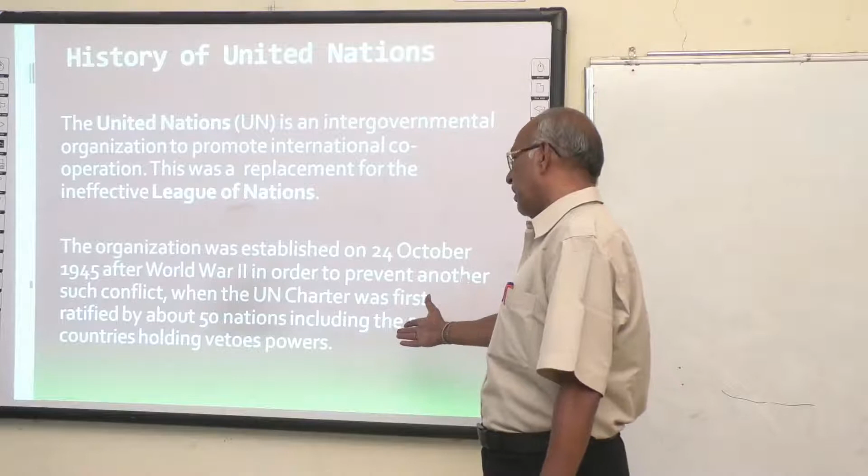Initially, it started off as the Inter-Governmental Maritime Consultative Organization. Since it was a consultative organization, the countries that were pioneering or trading in the sea were using it as a consultative organization to take counsel and consultations on topics which affected them in the shipping industry. But then it proved to be a toothless organization.

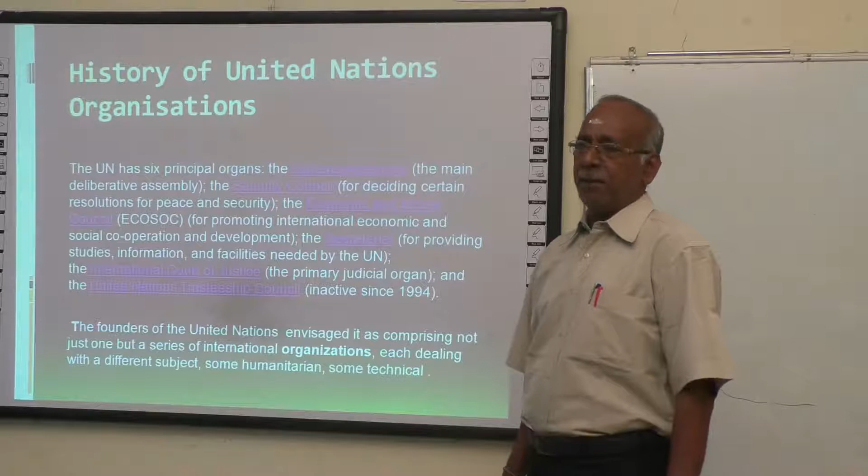Therefore, to make an effective organization to rigidly control the multivarious facets of shipping, the IMO came into being.

The United Nations has got 6 principal organs. Number 1 is the General Assembly. The second is the Security Council. The third is the Economic and Social Council. And then the Secretariat, the International Court of Justice, and the United Nations Trusteeship Council.

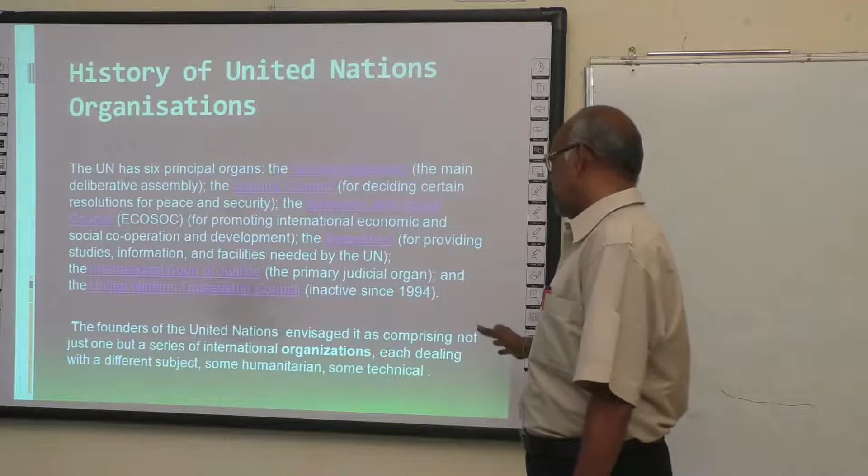The founders of the United Nations said that the international organization deals with different subjects, some humanitarian and technical. As a result, a number of specialized agencies were established, and agencies which already existed were brought within the framework of the United Nations. In 1944, the International Civil Aviation Organization was founded. The Food and Agricultural Organization (FAO) and the United Nations Educational, Scientific and Cultural Organization (UNESCO) were created in 1945, followed by the World Health Organization in 1947.

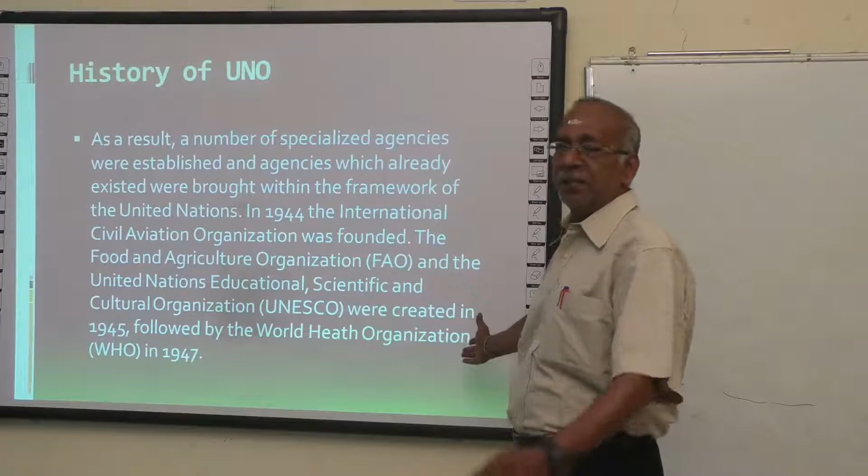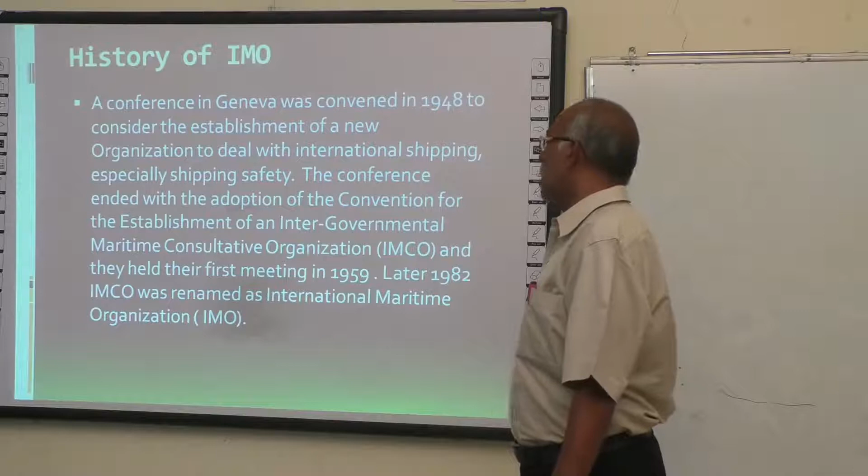A conference in Geneva was convened in 1948 to consider the establishment of a new organization to deal especially with the safety of ships. This conference ended with the adoption of the Convention for the Establishment of an Intergovernmental Maritime Consultative Organization, or IMCO. This IMCO is the forerunner, or preceding organization, for IMO, and later in 1982, IMCO was renamed the IMO, or International Maritime Organization.

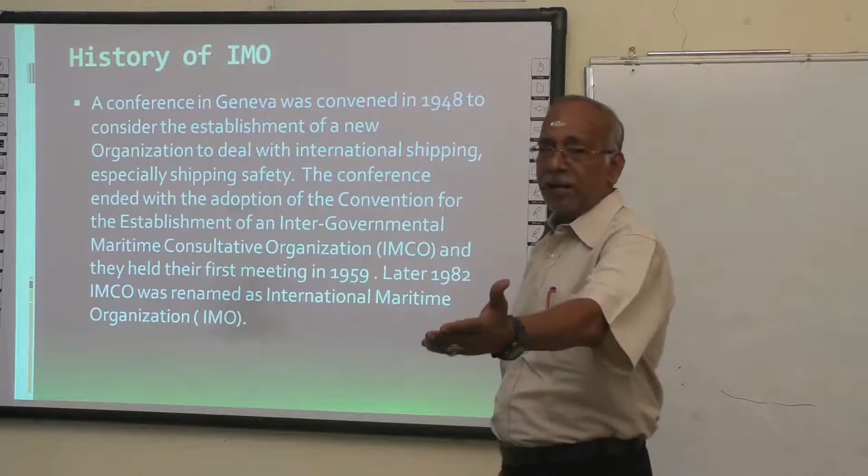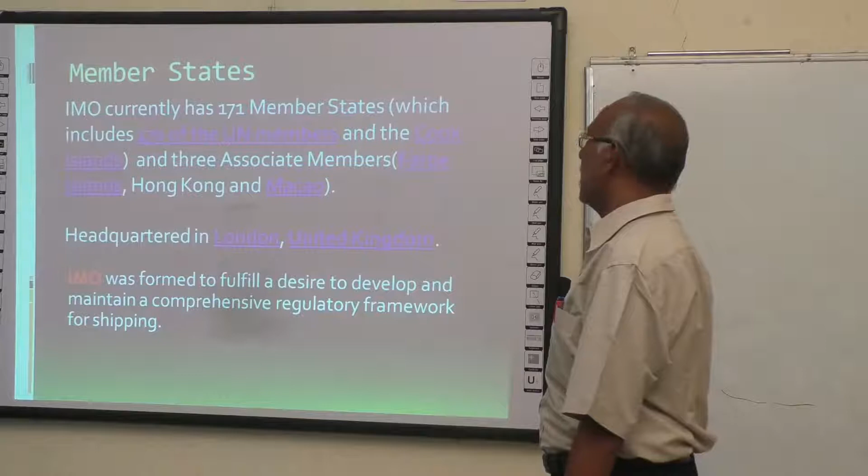Presently, IMO has a strength of about 171 members, 170 UN members and the Cook Islands, and 3 associate members, the Faroe Islands, Hong Kong, and Macau. The IMO's headquarters is in London, in the United Kingdom. It was formed to fulfill the desire to develop and maintain a comprehensive regulatory authority for framing the rules for shipping.

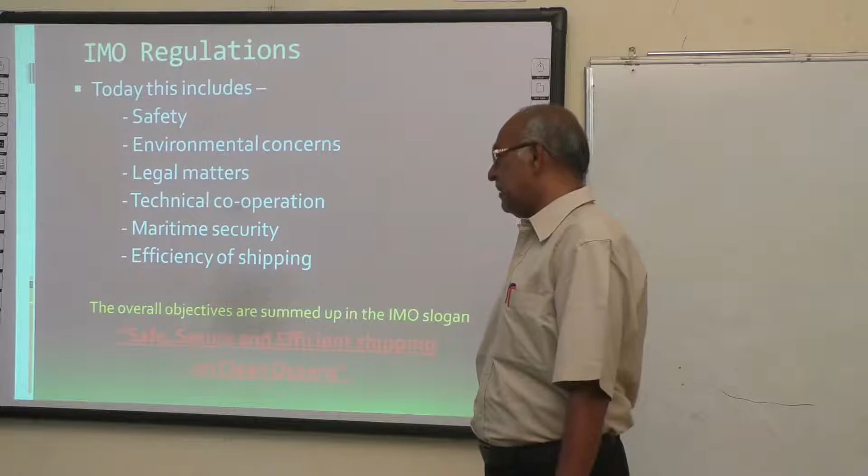IMO regulations, or some of the aims of IMO: first is safety, then to address environmental concerns, legal matters pertaining to shipping and hazards, technical cooperation among members, maritime security, and the efficiency of shipping. In short, putting it in a nutshell, the overall objectives are summed up as an IMO slogan, which says the aim of IMO is safe, secure, and efficient shipping on clean oceans. This is our main aim.

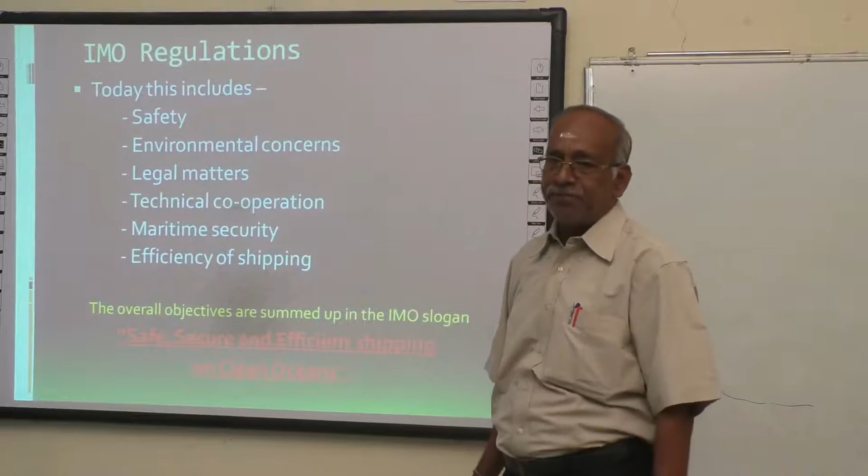So until this time, such international conventions were initiated piecemeal, notably SOLAS. It was first adopted in 1914, following the Titanic disaster. All of us must have at least heard, or many of us might have seen, the sinking of the Titanic, a ship that was built so rigidly, which broke after hitting an iceberg. Therefore, when marine casualties became very severe worldwide, there was a big hue and cry.

Ultimately, SOLAS, the expansion being Safety Of Life At Sea, was established. Whoever be the person cruising on the seas, be it as an employee or even as a passenger, the safety of life at sea was summed up in what is called SOLAS, which is a treaty that deals effectively with all important aspects of shipping.

IMO's first task was to update the convention, resulting in the 1960 convention.

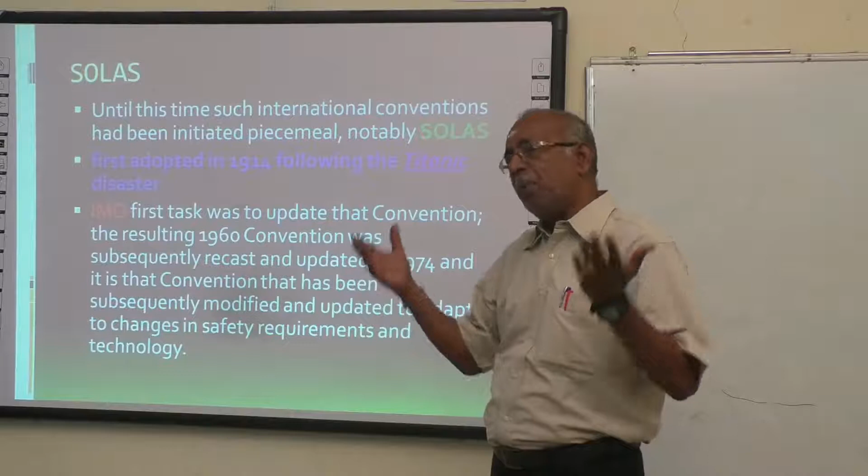A convention is nothing but a meeting. A meeting is organized among the nations, a general idea is put forth, it is deliberated, and then some resolutions are passed and brought into the framework as a rule. It has to be approved and agreed upon, then they fix up a window period for amendments, if there are any objections or alterations needed, and then they set a date of implementation from where it becomes an effective rule altogether.

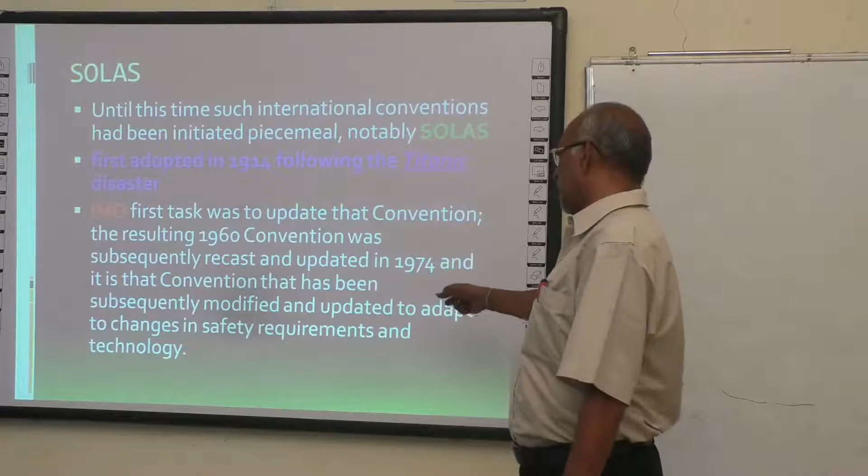Subsequently, it was recast and updated in 1974. It is a convention that has been subsequently modified and updated to adapt to changes in safety requirements and technology. That is why SOLAS stands for Safety of Life at Sea.

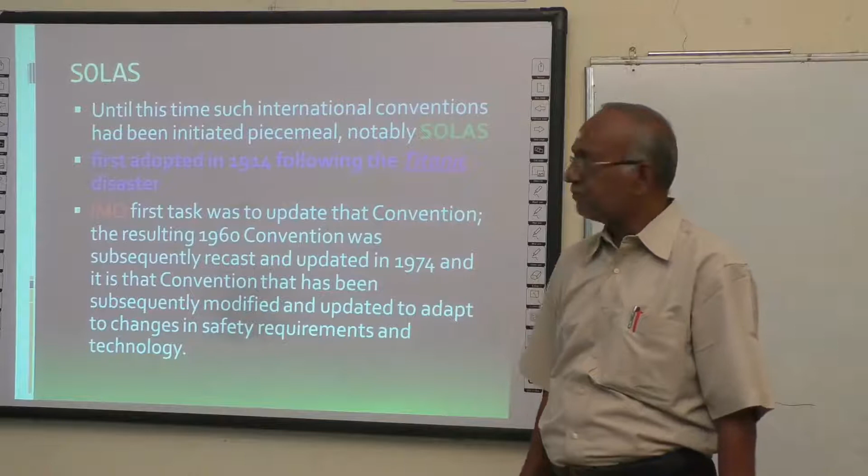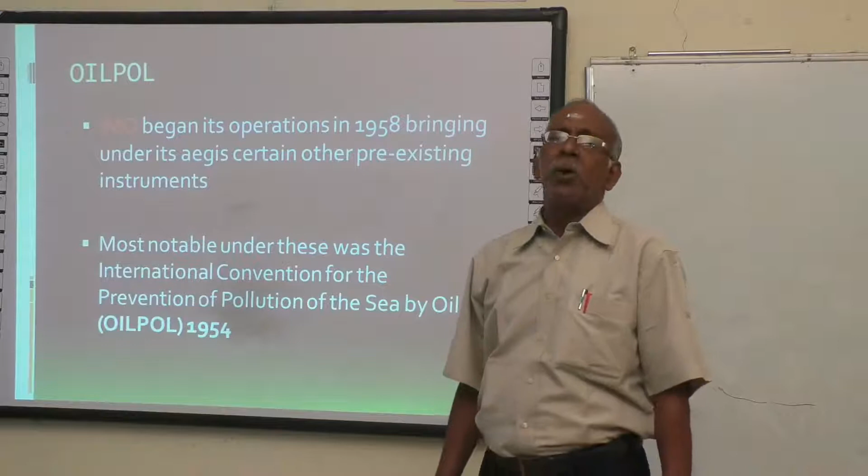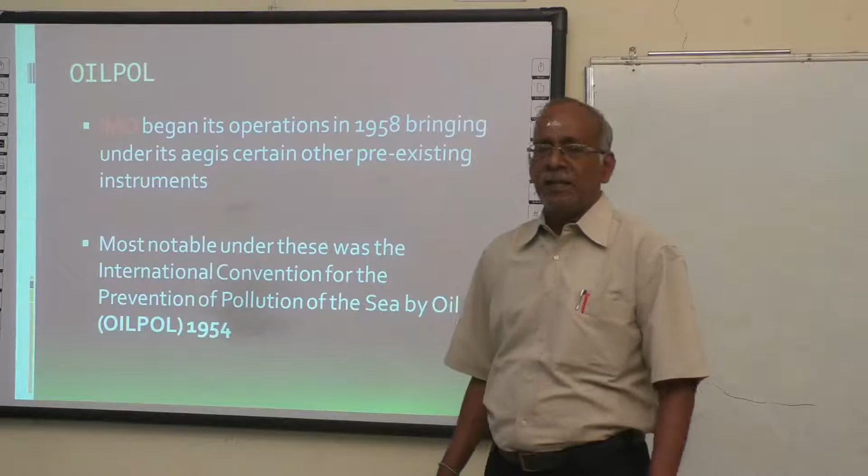The next topic they worried about is called OILPOL, a short form for oil pollution. From time immemorial, many unscrupulous ships have been pumping oil into the sea, polluting it. The main concern became oil pollution, which also resulted from shipping accidents like collisions or grounding, where ships get ripped open and oil contaminates the sea. Because of the pollution, marine life is affected, and most seashores, which are places of entertainment, hoteliering and tourism industries, were getting affected. Therefore the concern on oil pollution grew.

IMO began its operations in 1958, bringing under its aegis certain pre-existing instruments. This was actually existing earlier, as there was a meeting in 1954 regarding pollution of the seas by oil, called OILPOL 1954.

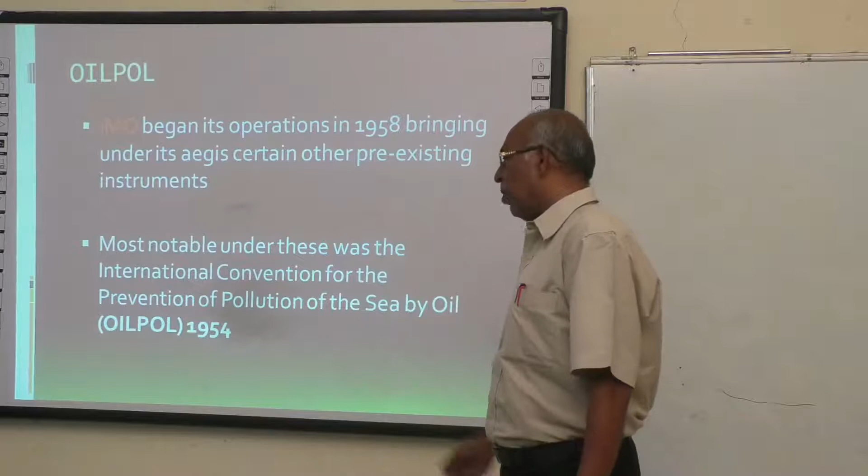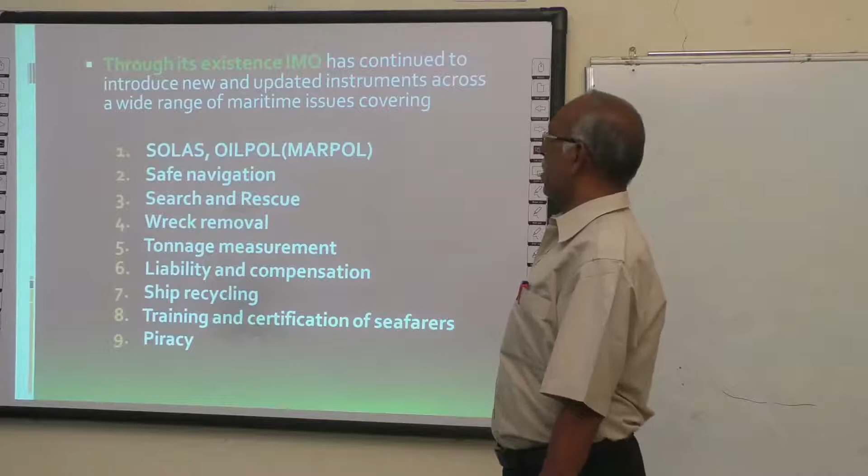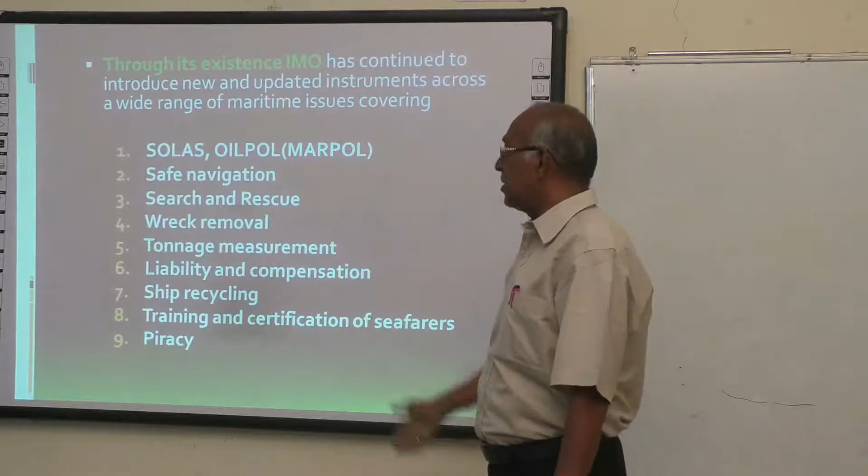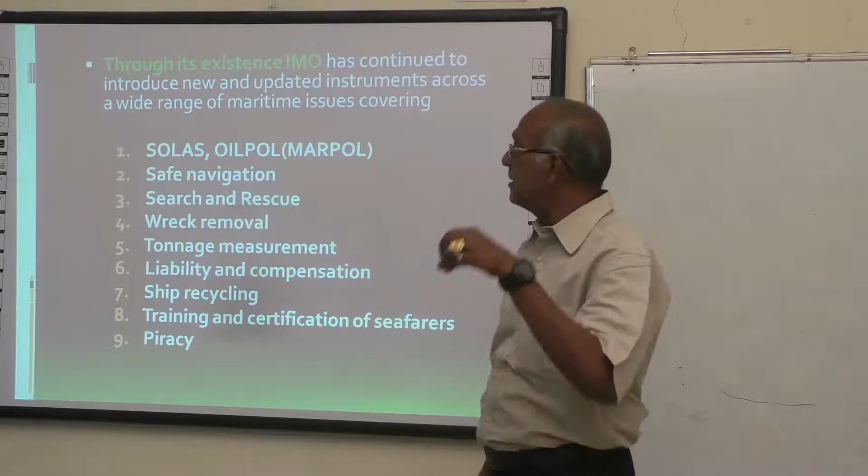Through its existence, IMO has continued to introduce new and updated instruments across a wide range of maritime issues. The topics IMO concentrated on are as follows: first, SOLAS and OILPOL, safety of life at sea and oil pollution, then safe navigation, and search and rescue. Search and rescue refers to when there is an unfortunate marine accident where lives are at stake, and people are picked up from the sea, searched for and rescued.

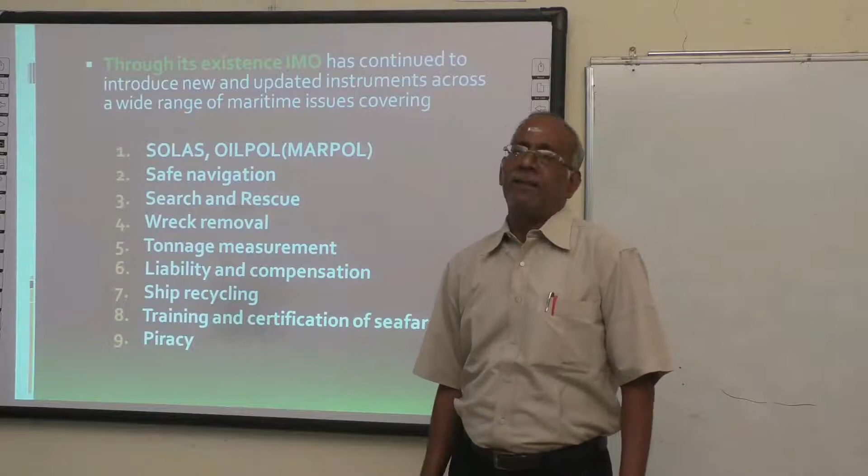Then wreck removal: when a vessel is in distress and already wrecked, it has to be removed so that it doesn't form a hazard for shipping. Then tonnage measurement for safe shipping, liability and compensation. In spite of all this, should there be any marine accident, the question of compensation by the affected parties arises, and from where to claim, how to recover, who will arbitrate, under what guidelines - these are dealt with under liability and compensation. And then ship recycling.

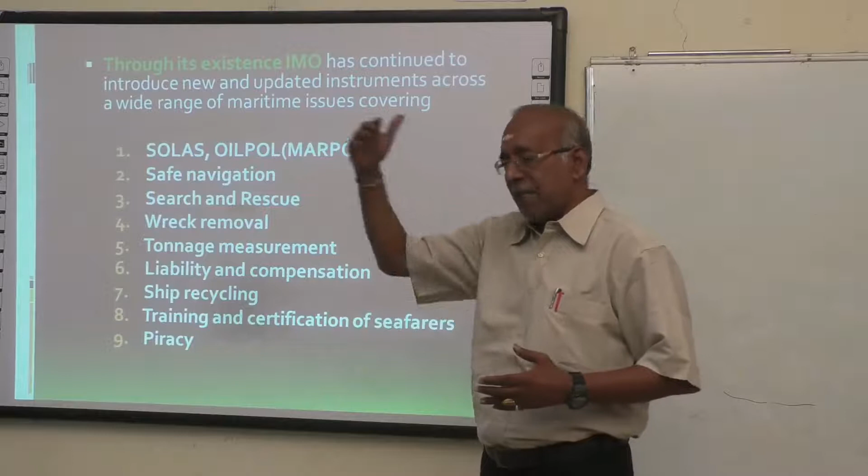A ship, like any other item, has a shelf life - a service life period of about 25 or 30 years. After that period of seaworthiness, the ship is scrapped and the plates are cut out, sent to re-rolling mills. Then steel plates are rolled out and new ships get built. That's what we call ship recycling.

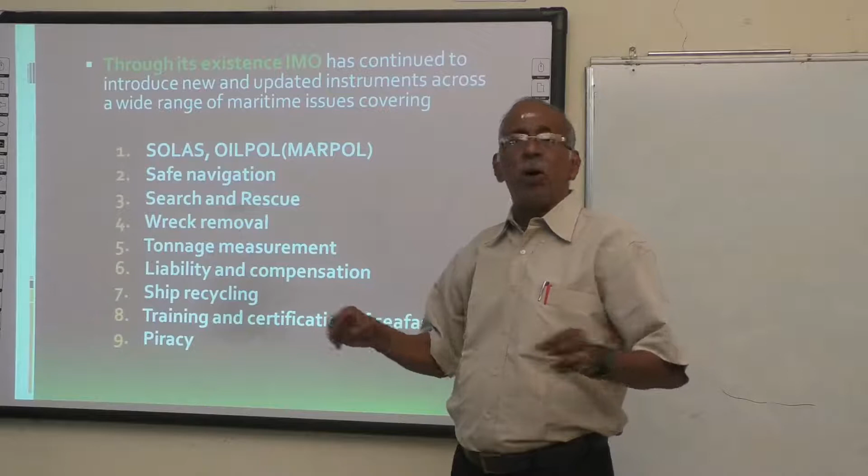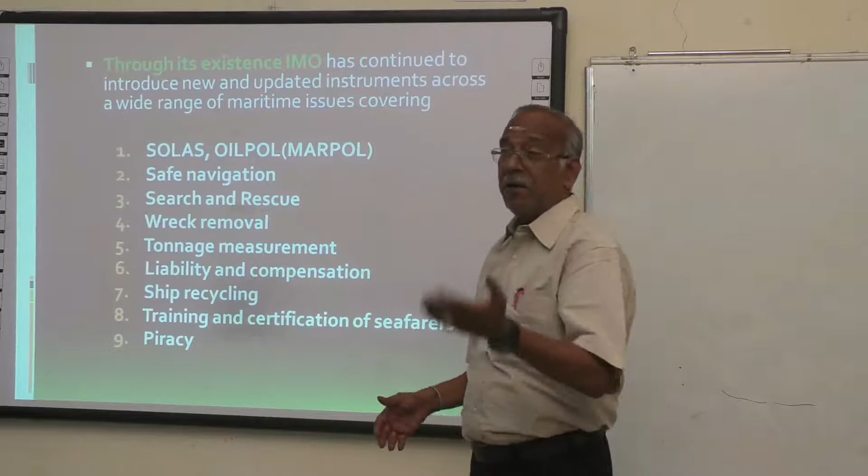And then training and certification of seafarers. Different nations have different training standards and different mediums of instruction. When the question of employability of a seaman goes to the international market, unless the standards of training and certification are made uniform, it becomes difficult for people of various countries to join together and work on different ships. When we have a mixed, multinational crew working on a single ship, unless the standards of their training, education and certification are uniform, the work becomes difficult. That is why training and certification of seafarers matters.

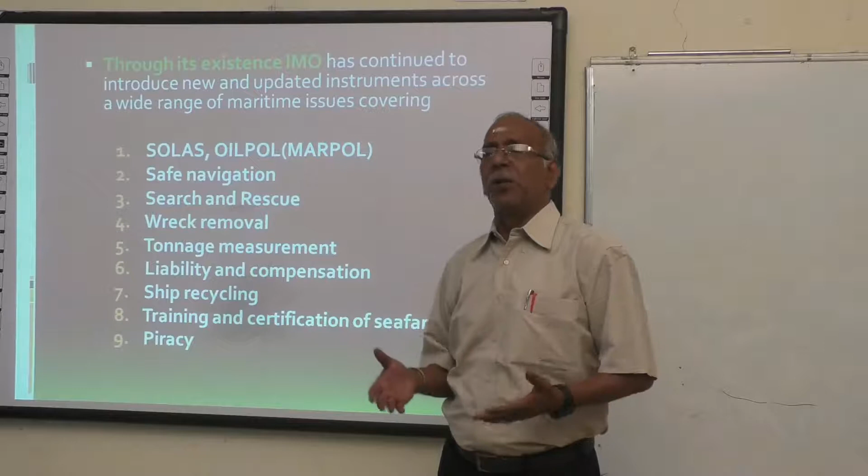And lastly, the new menace called piracy. Nowadays ships are being used as a tool, and ransom is extracted from helpless sailors for no fault of theirs. There are certain countries using piracy as a means of livelihood. In order to ensure the safety of living, there are certain standard practices which IMO will inform and enforce, which we will study shortly.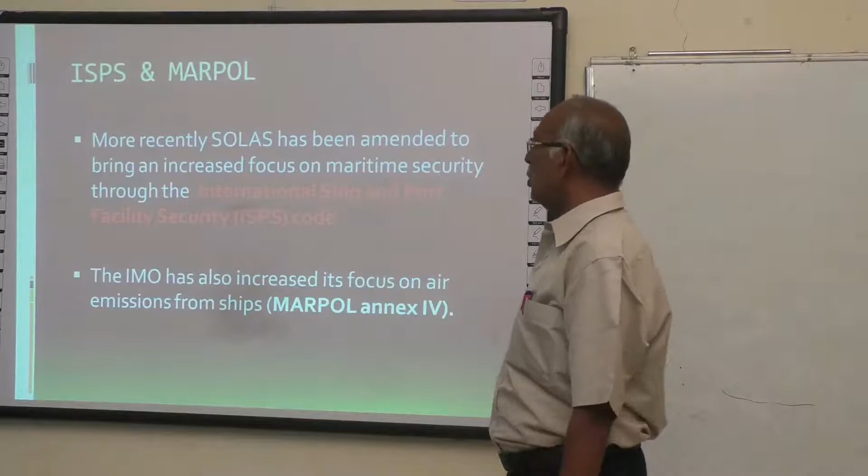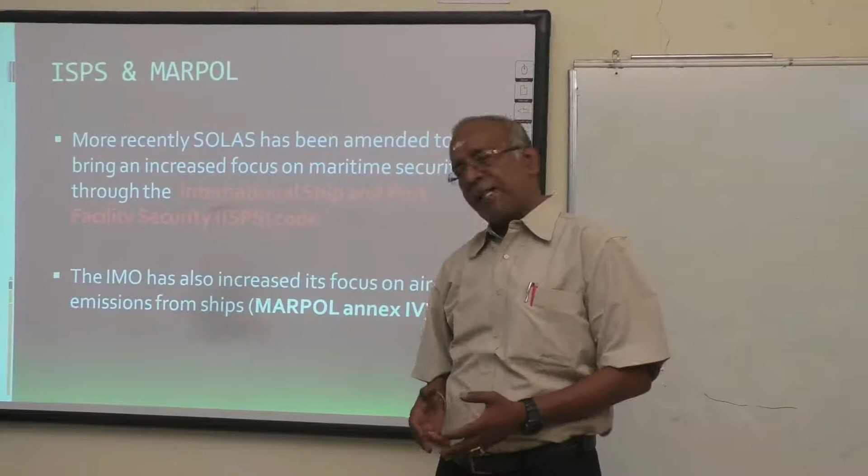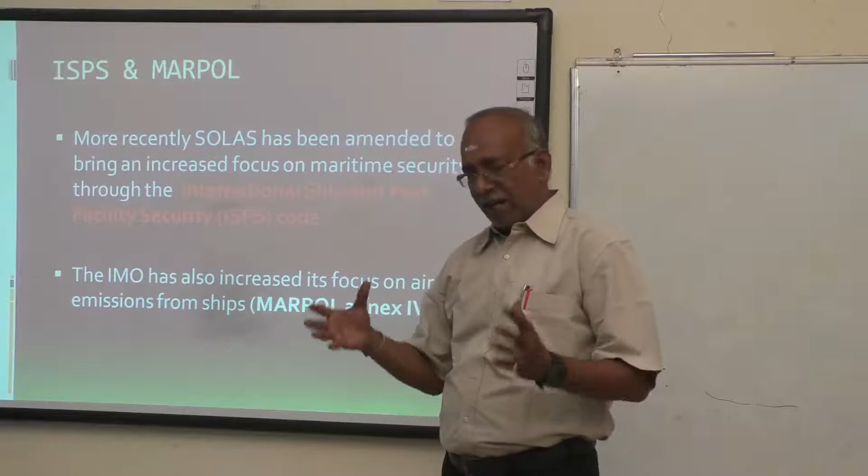ISPS and MARPOL. More recently, SOLAS has been amended to bring an increased focus on maritime security through the International Ship and Port Facility Security, or ISPS, code. This is primarily because of the menace of piracy. Since piracy has crept in, and for no fault of theirs the sailors are taken to task, their lives put at stake, held to ransom or as hostages, there is a need to know how to save the ship, how to defend yourself in case of a pirate attack, and how to react.

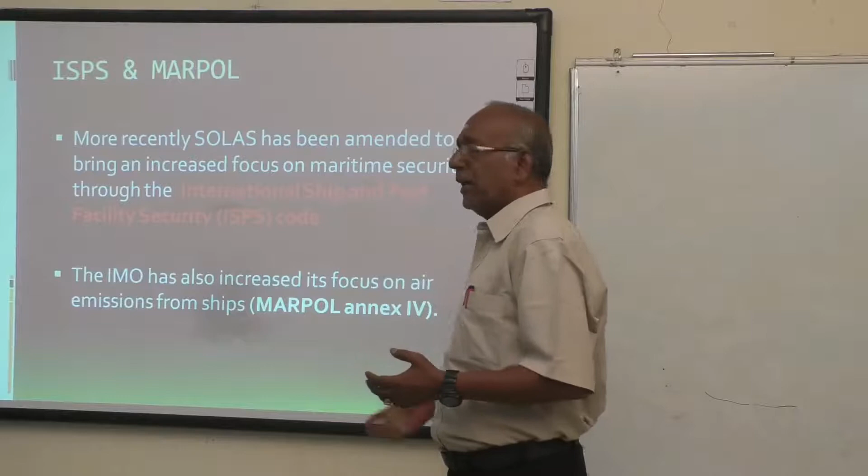That is what is called the ISPS code. IMO has also increased its focus on air emissions from ships. Earlier, in the oil code, we talked about oil pollution. Now they are also focusing on pollution of the air by emissions from ships, mostly from the funnel and uptake.

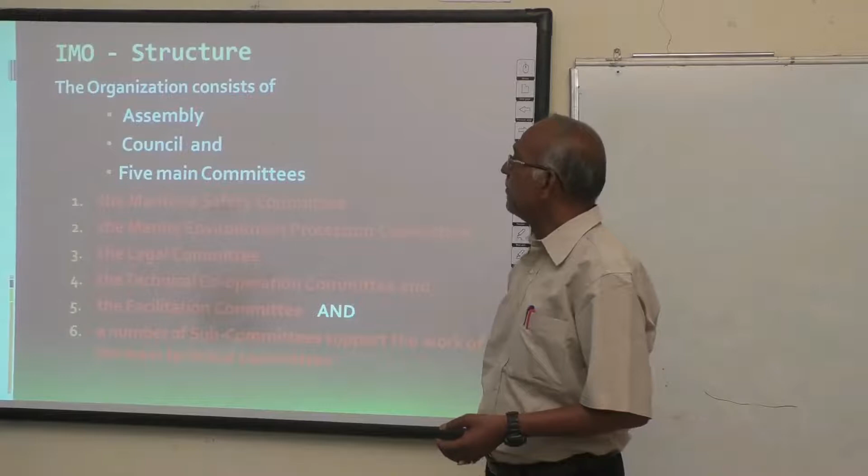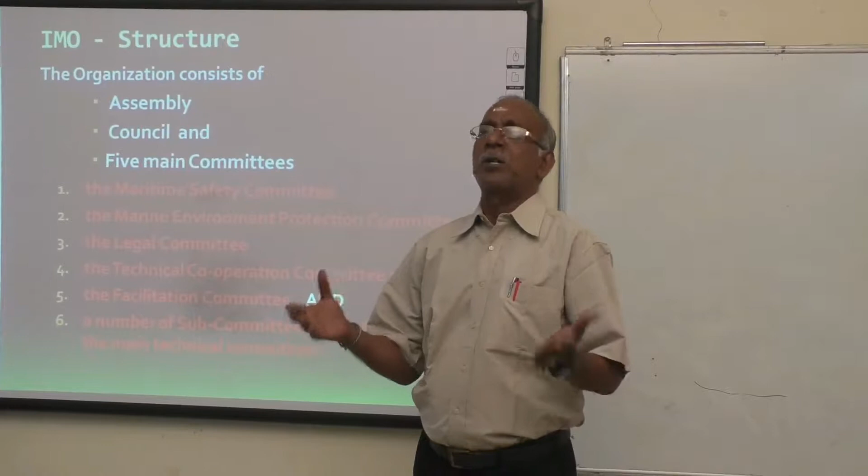Okay, having studied what is IMO and what are its aims, now let us see how IMO is structured, how it is functioning, and what are the various wings or departments of IMO.

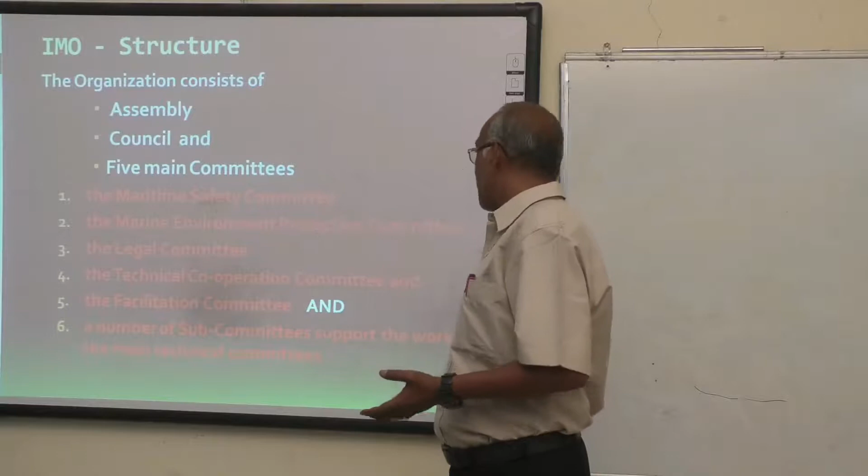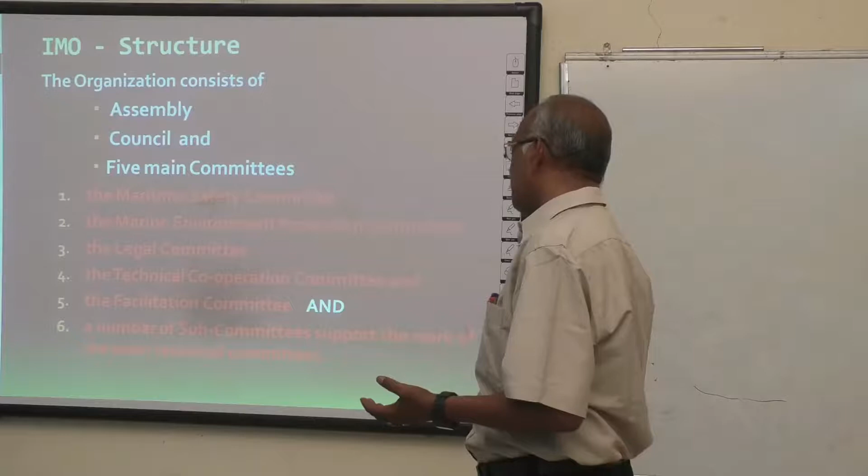The organization consists of mainly three things: the Assembly, the Council, and the five main committees. These five main committees consist of the Maritime Safety Committee (MSC), the Marine Environment Protection Committee (MEPC), the Legal Committee to deal with legal matters, the Technical Co-operation Committee, and the Facilitation Committee, along with a number of subcommittees to support the work of the main technical committee.

The governing body of the IMO is the Assembly. It meets once every 2 years, when all the members meet. In between Assembly sessions, a Council consisting of 40 member states elected by the Assembly acts as the governing body. So all members form the General Assembly, and from the Assembly, 40 members are selected to act as a governing body when the Assembly is not in session.

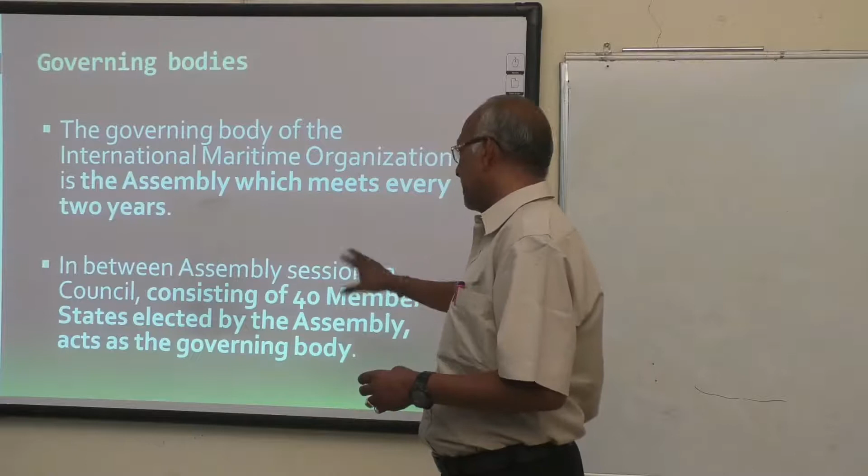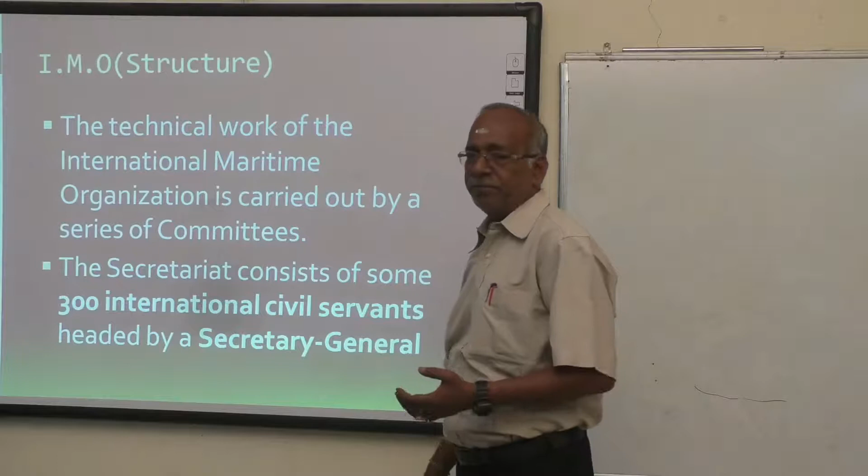The technical work for the International Maritime Organization is carried out by a series of committees. The Secretariat consists of some 300 international civil servants headed by the Secretary General. The current Secretary General is Koji Sekimizu, elected for 4 years at the 106th session of the IMO Council in June 2011, at the 27th session of the IMO Assembly, with his mandate starting on 1st January 2012.

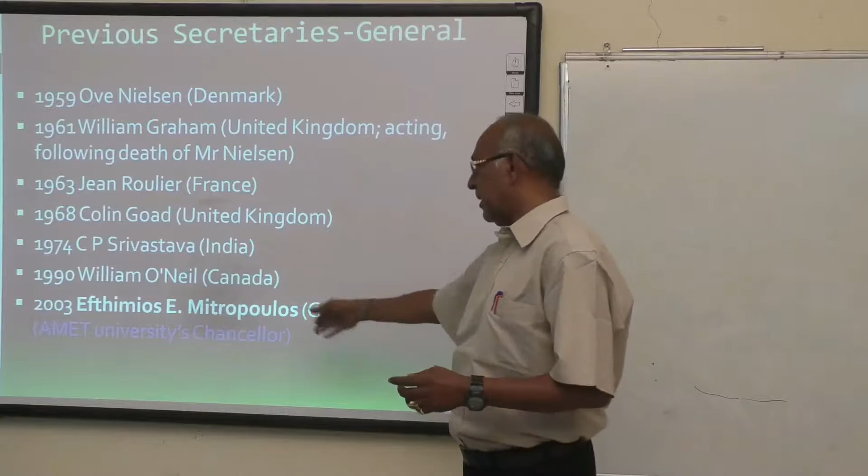Regarding previous Secretary Generals, you should be happy to know that Mr. C.P. Srivastava from India himself was one of the Secretary Generals of IMO, in the year 1974. There have been many other notable people, especially Efthimios Mitropoulos, whom as AMETians we should be proud to share visited us, and he is the Chancellor of AMET University.

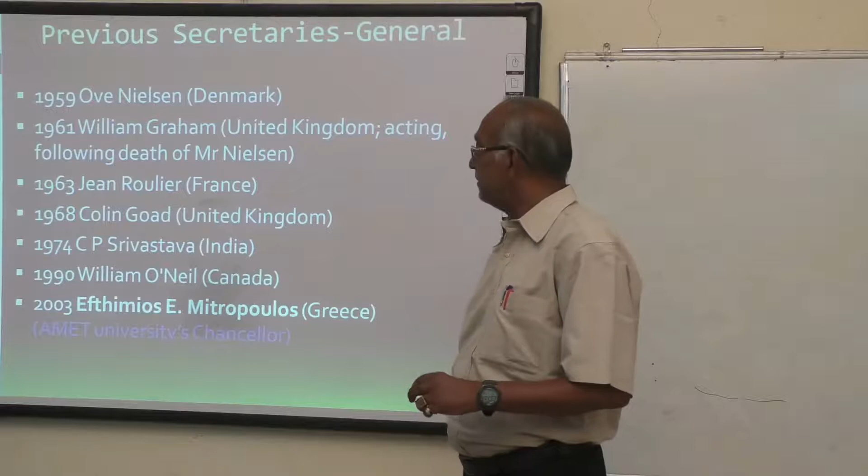Okay, the legal instruments - how is the legal framework or legal work being carried out? IMO is the source of approximately 60 legal instruments that guide the regulatory development of its member states to improve safety at sea, facilitate trade among seafaring states, and protect the marine environment. Well known ones are SOLAS, COLREG, and PSC. SOLAS stands for Safety of Life at Sea, COLREG stands for collision regulations, and PSC stands for Port State Control.

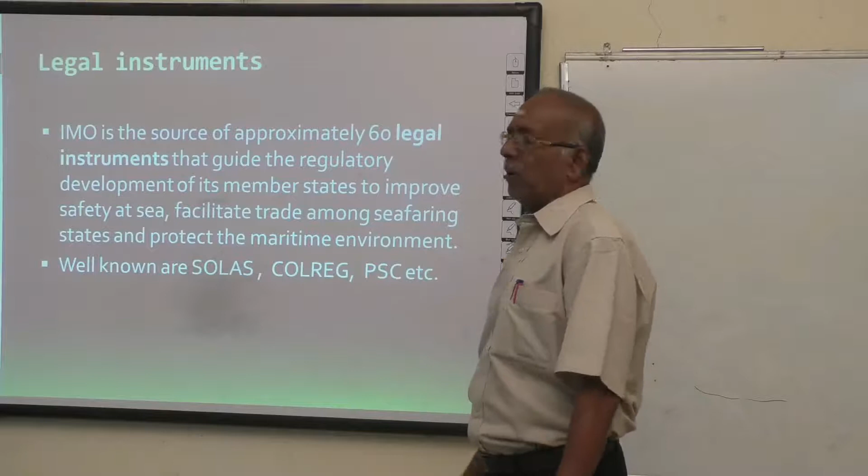Okay, what are the functions? Now that we know what IMO is, what the structure of IMO is, and what the aims of IMO are, let us see how IMO functions.

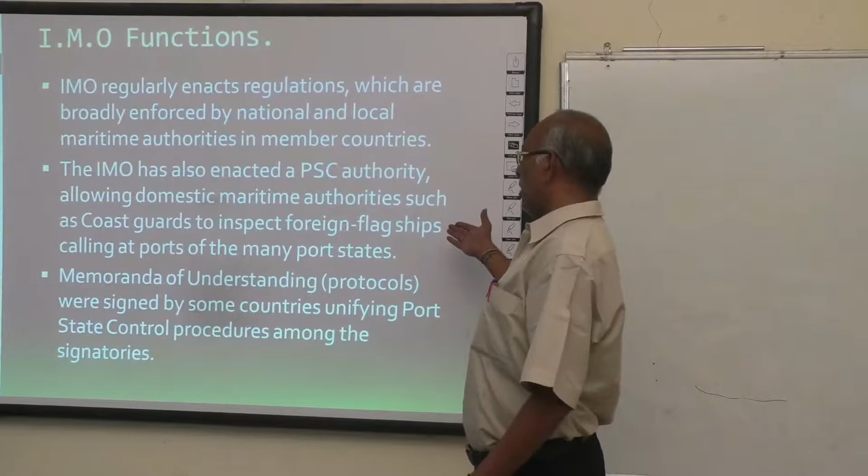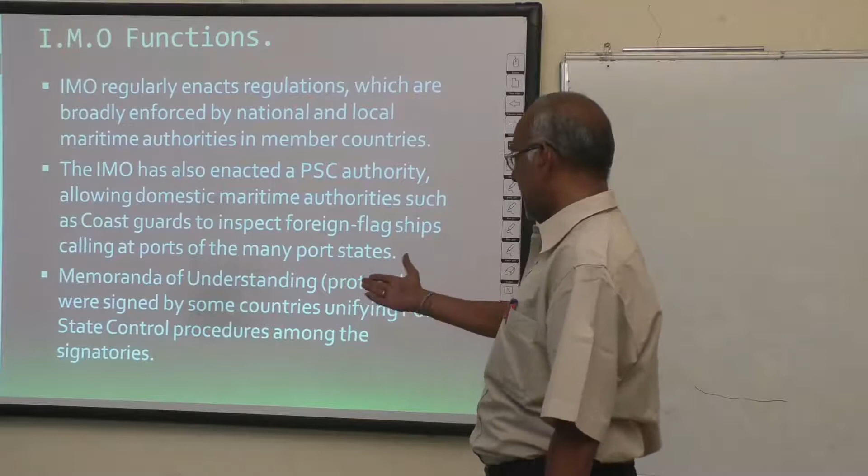IMO regularly enacts regulations which are broadly enforced by the national and local maritime authorities of member countries. IMO has enacted PSC authority, allowing domestic maritime authorities like the Coast Guard to inspect foreign-flag ships calling at ports of any state. Memoranda of understanding or protocols are signed by some countries unifying port state control procedures among the signatories.

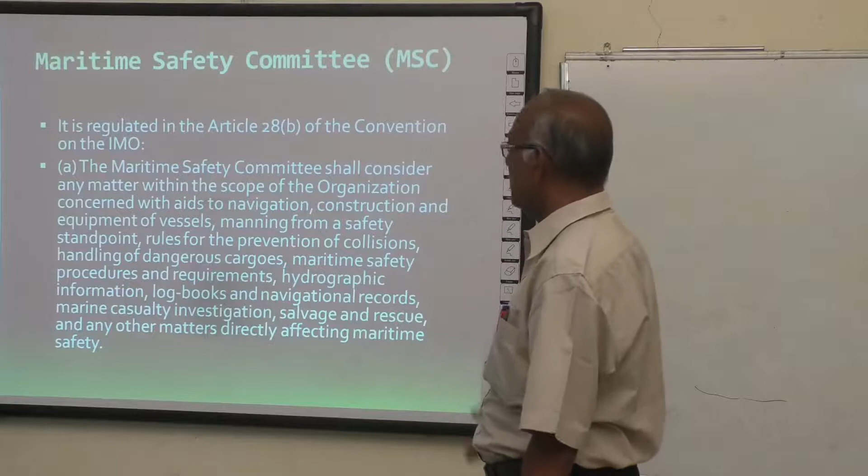Article 28B regulates the Maritime Safety Committee, covering any matter within the scope of the organization concerned with aids to navigation, construction and equipment of vessels, and manning from a safety standpoint. This is very important because nowadays, with rising oil prices, many countries try to cut corners by cutting down the workforce. In that case, concerning the safety of the ship and its personnel, IMO has stepped in and enforced certain rules stipulating the minimum required manpower, because given a choice, owners would like to automate more and cut down on the human element.

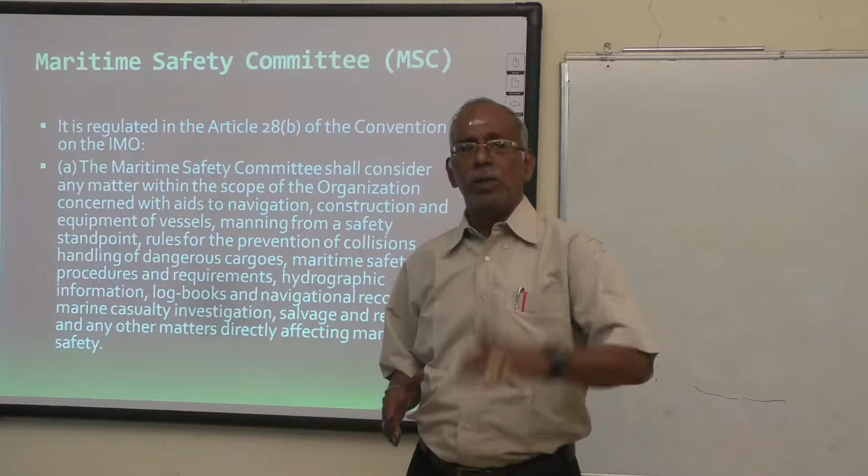Therefore, they started manning from a safety viewpoint - rules for prevention of collisions, handling of dangerous cargo, maritime safety procedures, hydrographic information, logbooks, navigation records, casualty investigation, salvage and rescue, and any other matter directly affecting maritime safety.

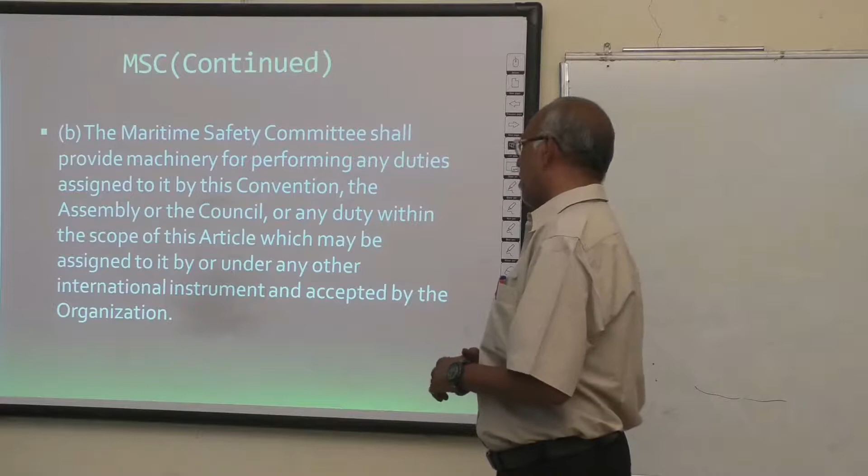Okay, now the MSC or Maritime Safety Committee - it is one of the main organs or committees of IMO. It provides the machinery for performing any duties assigned to it by the convention, the Assembly, or the Council, or any duty within the scope of this Article which may be assigned to it by or under any other international instrument accepted by the organization.

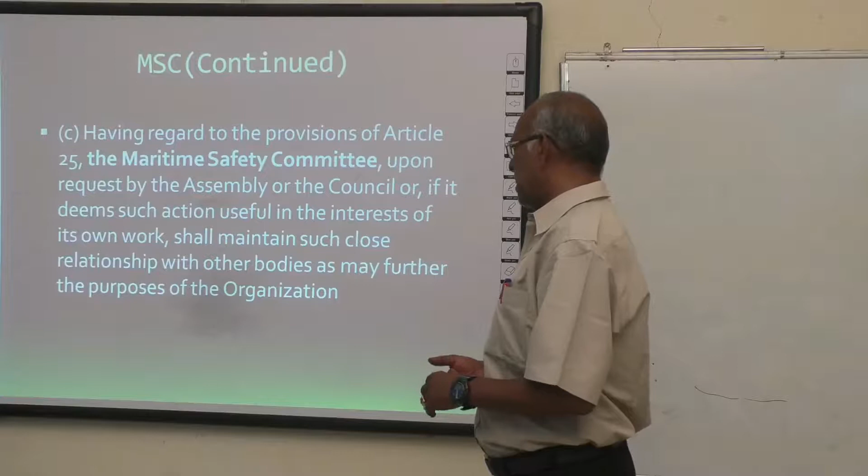Having regard to these provisions, the Maritime Safety Committee, at the request of the Assembly and in the interest of its overall work, maintains such close relationships with other bodies as are needed for the proper functioning of IMO.

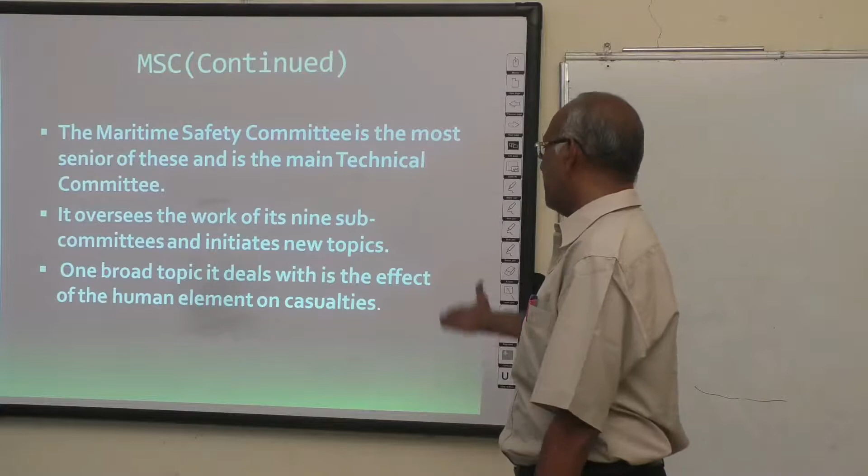The Maritime Safety Committee is the most senior and the main technical committee. It mainly oversees the work of the 9 subcommittees and initiates new topics. Among broad topics, it deals with the effect of the human element on casualties, because analysis of marine accidents has found that about 85% of accidents have been caused by human error. Therefore, apart from machinery failures, the major contributor to failures is the human element, which is why they deal with the effect of the human element on casualties.

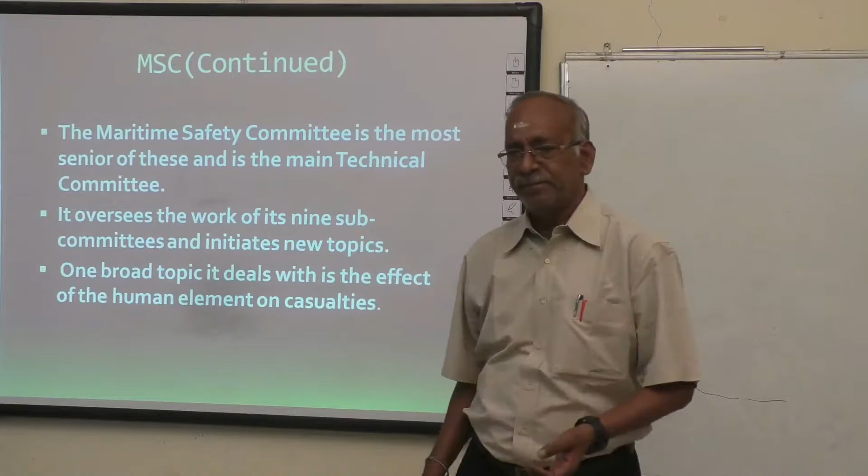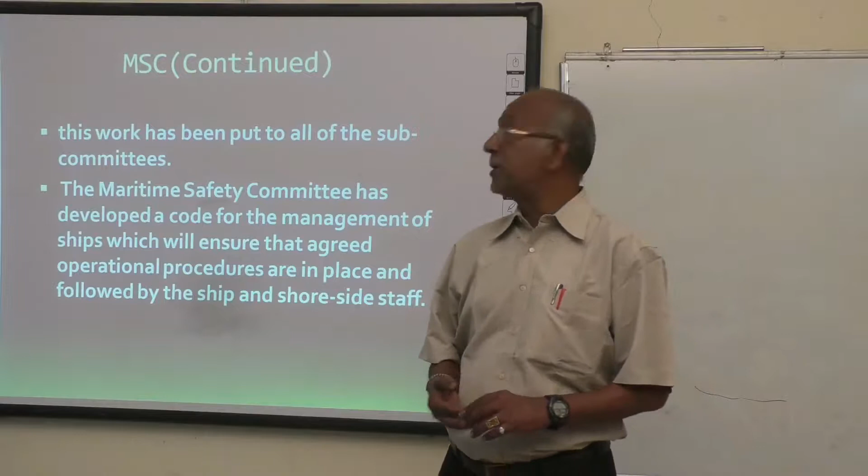This work has been put to all the subcommittees. The Maritime Safety Committee developed a code for the management of ships, which will ensure agreed operational procedures are in place, followed by the ship and shoreside staff.

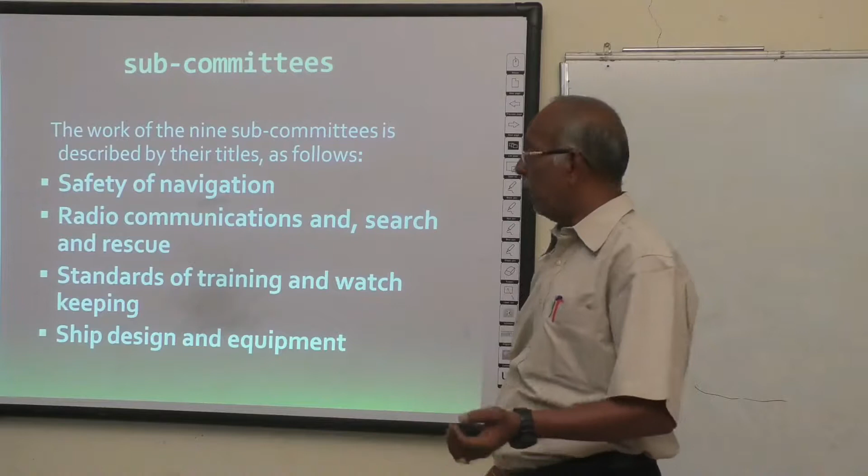Fire protection, stability, load lines, fishing vessel safety, flag state implementation, dangerous goods, solid cargoes, containers, and bulk liquids and gases.

The subcommittees work on numerous topics, including, for example, improvements in the design of passenger ships and the requirements for the stowage and packaging of a vast range of dangerous goods carried by sea.

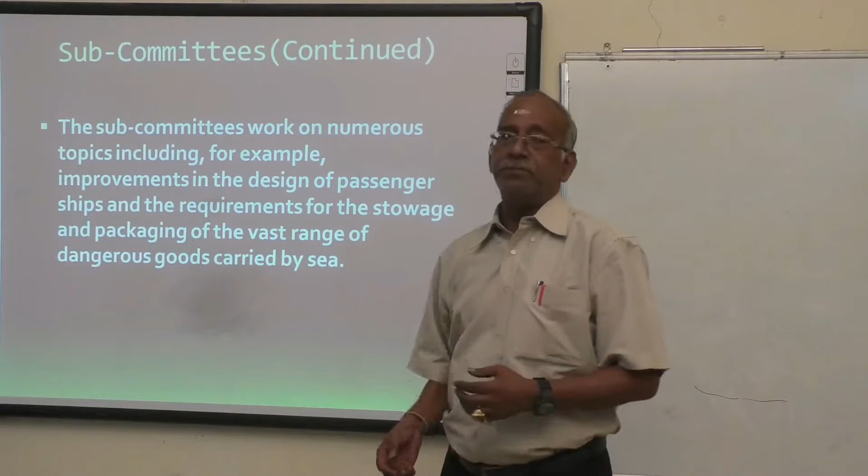Now, having seen MSC, we pass on to MEPC, or the Marine Environment Protection Committee. It was established in November 1973. It is responsible for coordinating activities in the prevention and control of pollution of the marine environment by ships. Their main thrust is on preventing the pollution of the sea.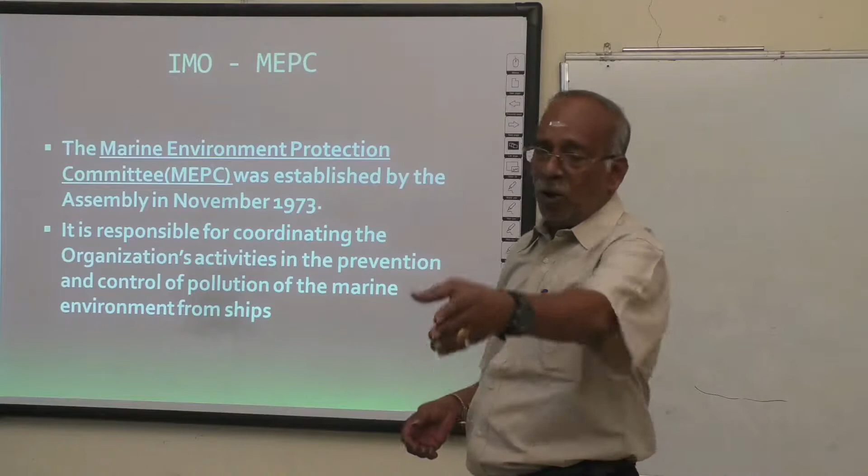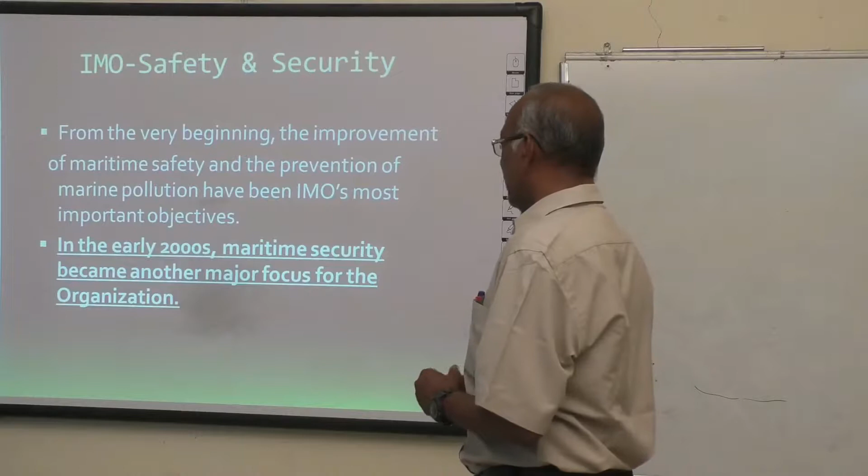IMO's safety and security focus is on the improvement of maritime safety and prevention of marine pollution. This was IMO's main objective, but in the early 2000s, maritime security became another major focus for IMO.

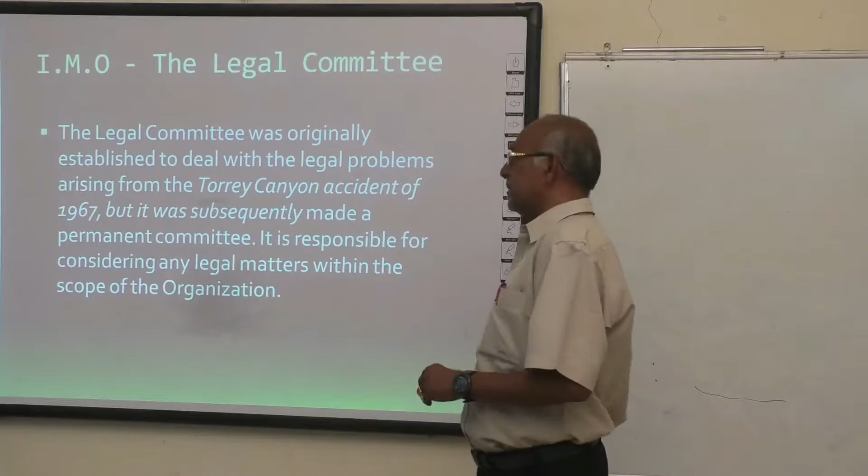Next is the Legal Committee. The Legal Committee was originally established after the problems arising due to the Torrey Canyon. Torrey Canyon was a tanker. It went through an accident in 1967, and it was made temporary first, then it became a permanent committee. It is responsible for considering any legal matters within the scope of the IMO organization.

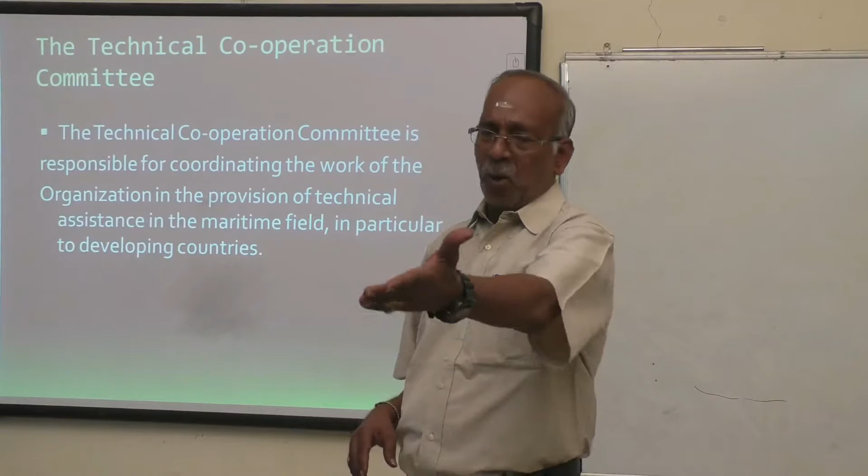The Technical Cooperation Committee is responsible for coordinating the work of the organization in providing technical assistance in the maritime field, especially for those countries which are either underdeveloped or developing. Apart from the well-advanced pioneering countries, most of the other countries in Africa and Asia, when they are developing, need technical cooperation, hence the Technical Cooperation Committee.

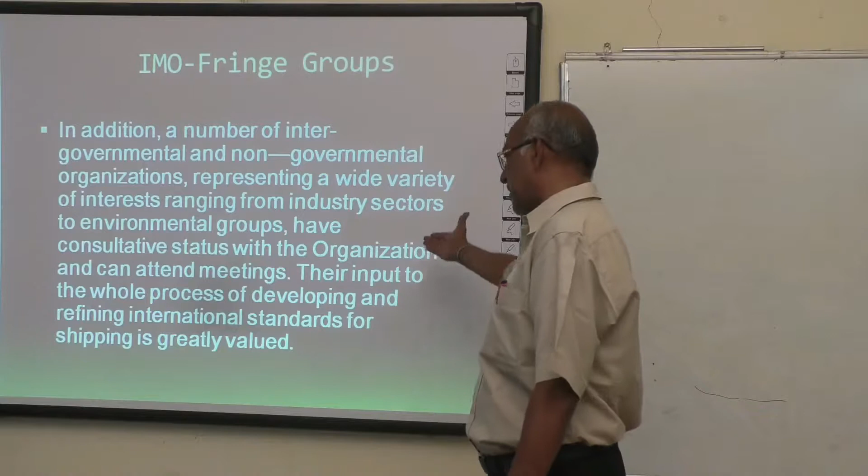There are other fringe or additional groups, for example what we call NGOs. Apart from this, a number of intergovernmental or non-governmental organizations, called NGOs, represent a wide variety of interests and hold consultative status. The organization can attend meetings, and their input to the whole process of developing and refining international standards for shipping is greatly valued.

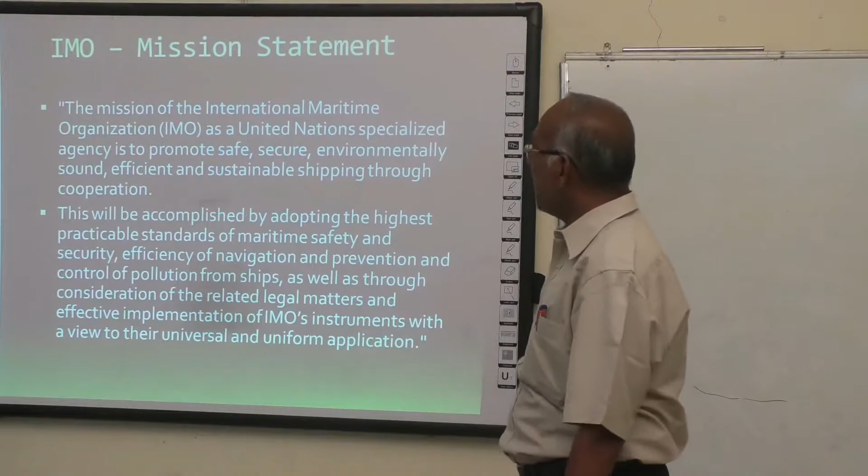The mission of the Maritime Organization as a United Nations specialized agency is to promote safe, secure, environmentally sound, efficient, and sustainable shipping through cooperation. How can this be accomplished? This will be accomplished by adopting the highest practicable standards for maritime safety and security, efficiency of navigation, and prevention and control of pollution from ships, as well as through consideration of related legal matters and effective implementation of IMO's instruments, with a view to universal and uniform application.

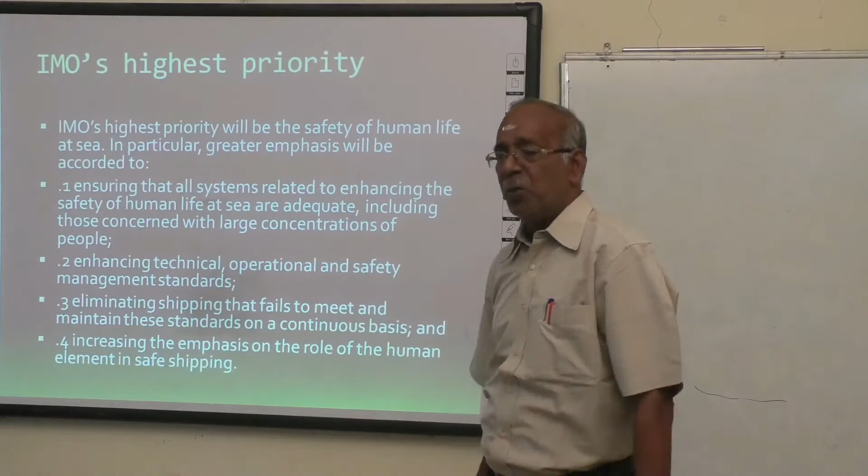Therefore, coming back to what we have been saying so far, summing up: IMO stands for safe shipping, secure shipping, environmentally sound shipping, efficient shipping, sustainable shipping, adoption of the highest practicable standards, implementation of instruments, and capacity building.

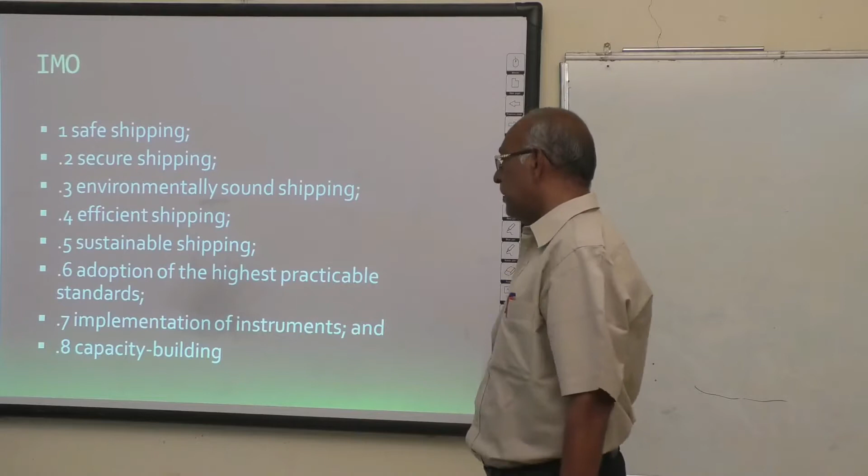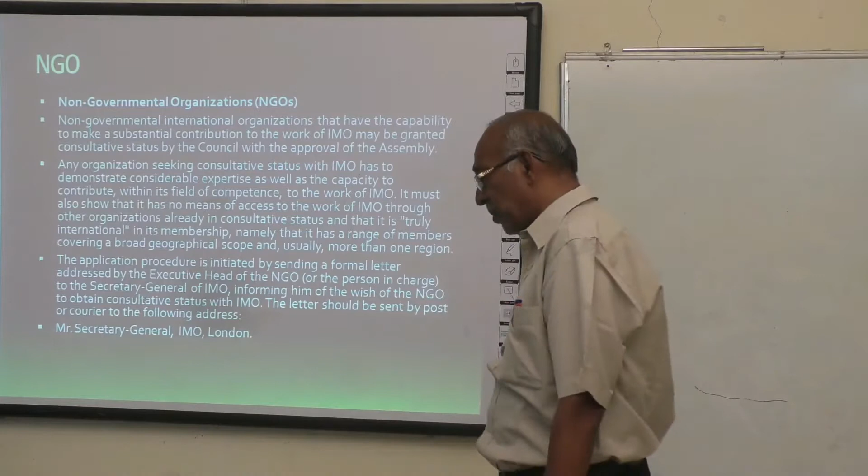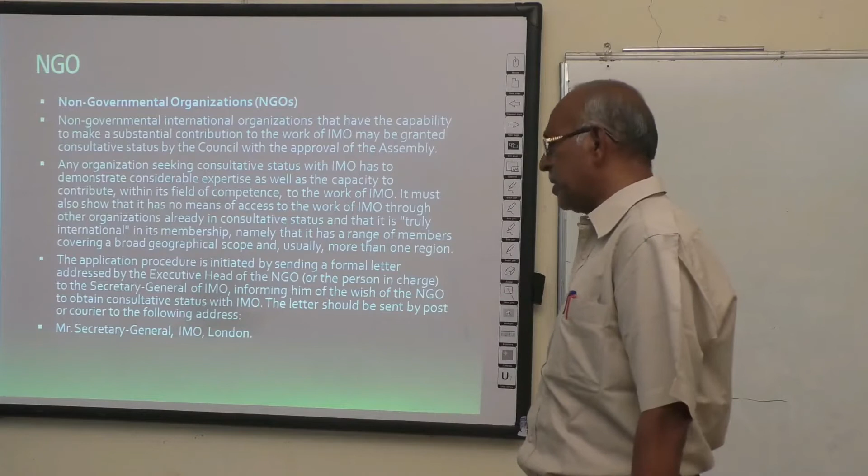We already gave a brief glimpse of what an NGO is. Let us see what NGO means. NGO means non-governmental organizations, non-governmental international organizations that could make a contribution to the work of IMO, and may be granted consultative status by the Council with the approval of the Assembly. Those desirous of contributing could apply to the Secretary General at IMO London, and then get the process initiated and get the approval of IMO through the Assembly and the Council.

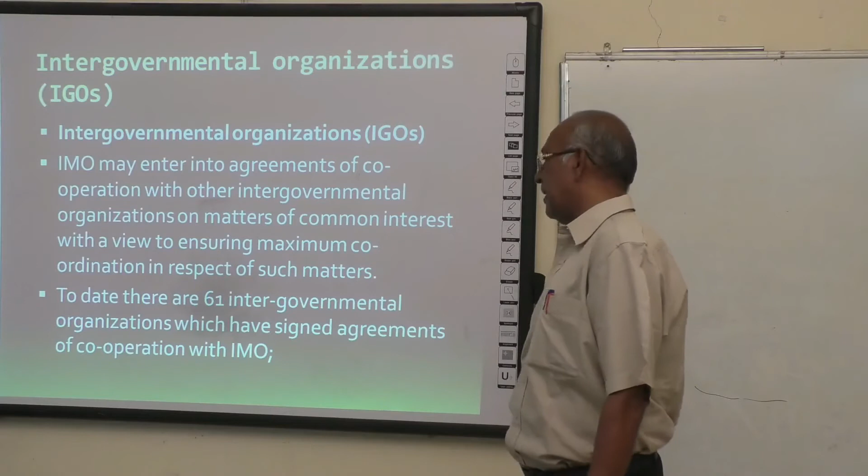Then we have IGOs. Apart from NGOs, which stand for non-governmental organizations, IGO stands for intergovernmental organizations. IMO may enter into agreements for cooperation with other intergovernmental organizations on matters of common interest to ensure maximum coordination in related matters. Today, there are 61 intergovernmental organizations which have signed agreements of cooperation with the IMO.